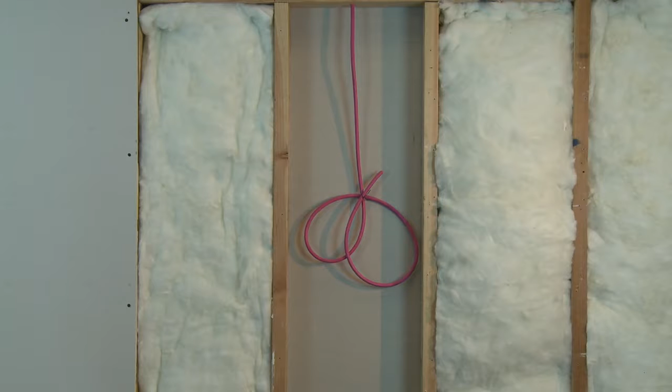Number 1. Preparation. Installation requires choosing a stud bay or ceiling joist with studs 16 inches on center. This video assumes the wire has been run to the speaker location. The Sonance website provides more information about suitable wire gauges.

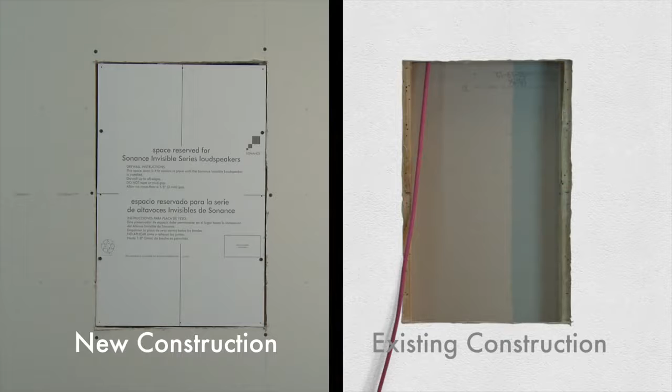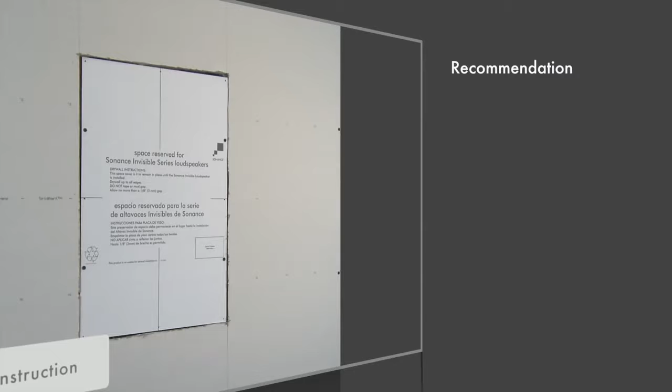Speakers are often installed into existing walls, and we'll address that process shortly. The other common case is that speakers will be installed in new construction or renovation. We'll start with the typical new construction drywall installation. A space saver can be used as a placeholder during construction. We recommend placing the Invisible Series speakers above 6 feet to minimize potential damage from picture hangers and nails.

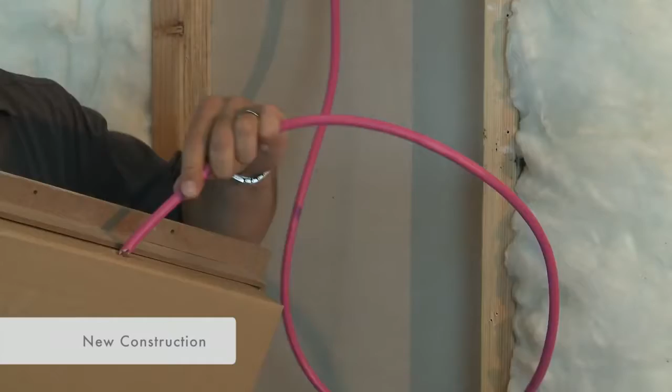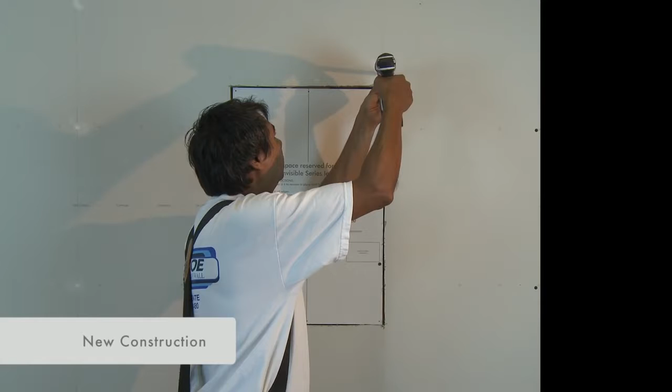Run the speaker cable through one of the pre-drilled holes in the space saver. Make sure there is enough extra wire to connect the speaker after the space saver is removed. With the aid of a level, screw the space saver to the studs in the chosen location. Transfer the space saver dimensions to the drywall, then score and cut an opening in the sheet.

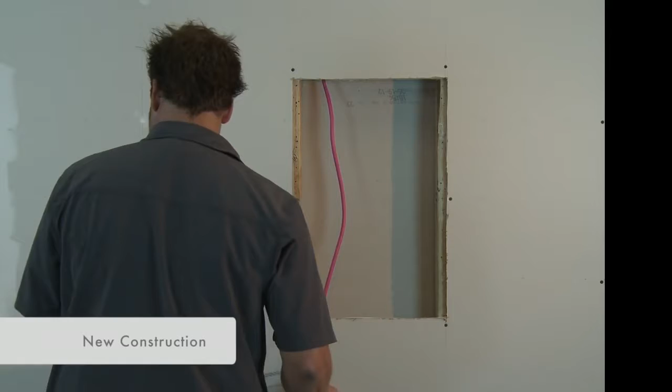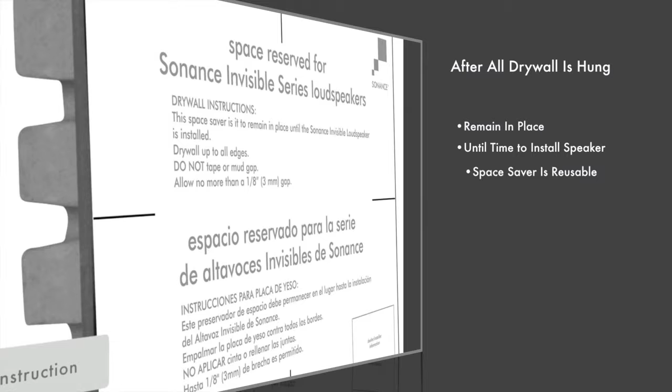Hang the drywall around the space saver and secure it to studs. Once the space saver is removed, the opening is ready for speaker installation. After all drywall is hung, the space saver can remain in place until it is time to install the speaker. Remember that the space saver is reusable and can be used multiple times. Construction would now continue as normal. The space saver should be removed when it's time to install the speaker.

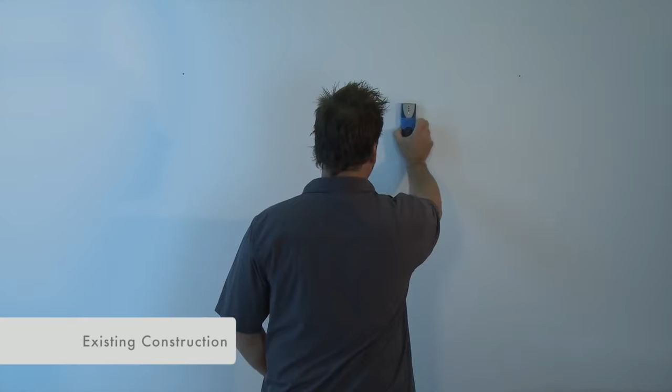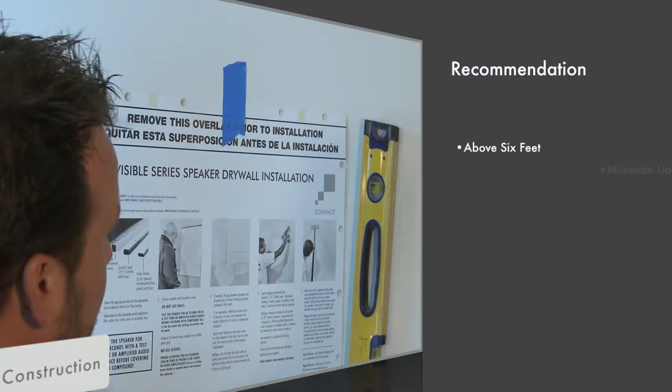Now we'll talk about installing the speaker in existing construction. Location is critical. Use a stud finder to locate studs or joists to the right and left of the chosen position. Mark the stud center lines. We recommend placing the Invisible Series speakers above 6 feet to minimize potential damage from picture hangers and nails. Use the speaker or overlay as a template to mark the exact outline of the speaker.

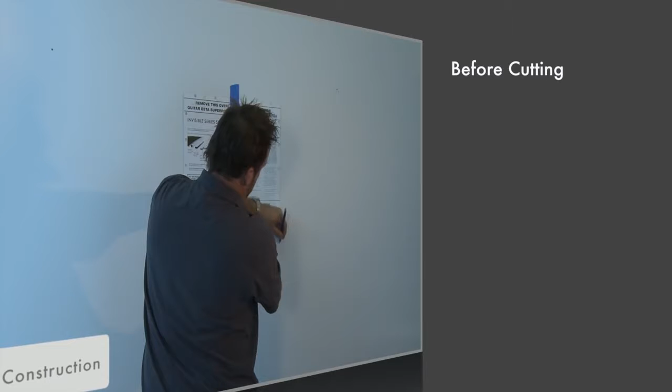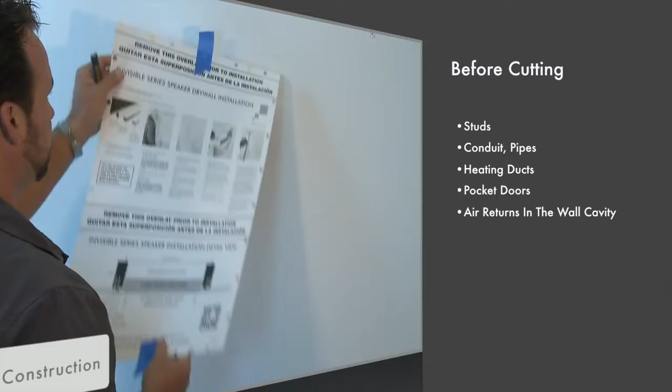Before cutting anything, perform an obstruction survey to be certain that there are no studs, conduit, pipes, heating ducts, pocket doors, or air returns in the wall cavity that will interfere with the speaker. If there are, choose a new location and repeat these steps. Following the outline, cut the speaker opening in the drywall. Now the speaker is ready to be installed. At this point, the speaker installation is the same for new construction as for existing construction.

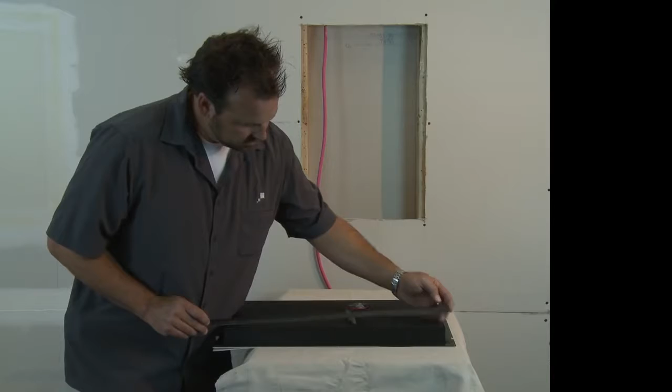Number 2. Installation. Select the appropriate shim to make the speaker surface flush with the drywall. The design allows you to match 5/8 inch, 1/2 inch, or the most common international thickness drywall. Peel the adhesive backing off the shim, then align the pre-drilled screw holes and press the shim firmly into position on the back of the speaker frame.

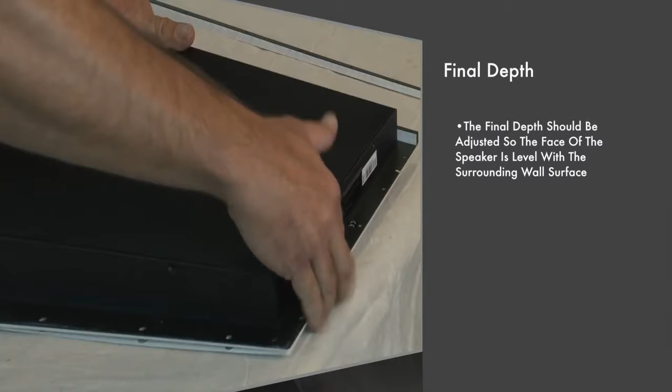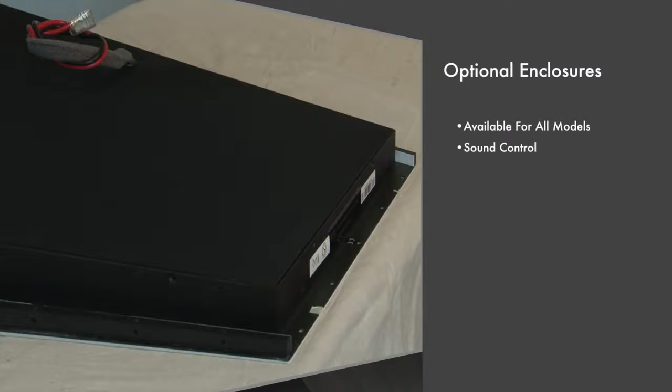The supplied cardboard shims can be attached to the studs to fine-tune the speaker depth. The final depth should be adjusted so the face of the speaker is level with the surrounding wall surface. Optional enclosures are available for all models and can be used in installations to minimize sound transfer into adjacent rooms. Using the enclosure is required for open attic installations.

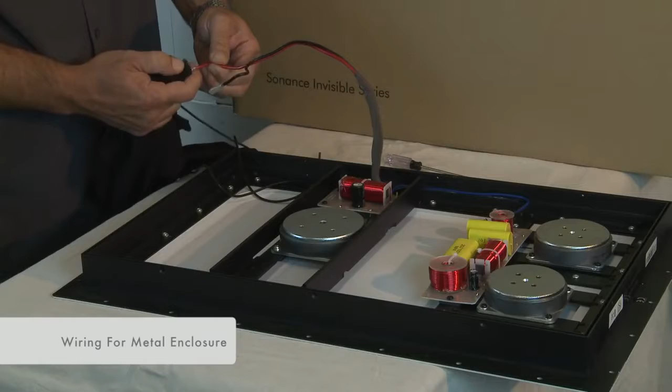To install the enclosure, remove the grill covering on the back of the speaker. Attach the speaker wires to the terminal on the enclosure. Place the enclosure in the groove in the back of the speaker frame. Attach the enclosure using the supplied screws. Where the enclosure is not being used, the area behind the speaker should be filled with fiberglass insulation.

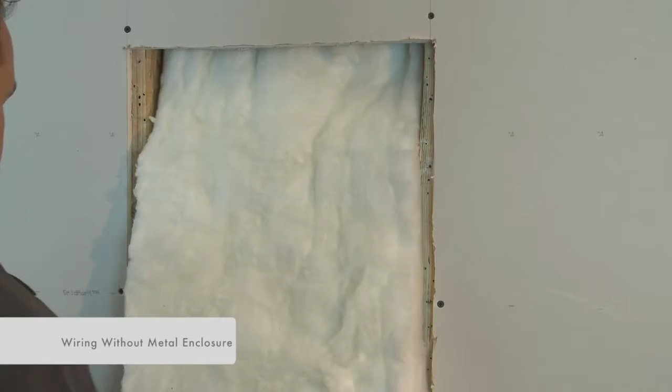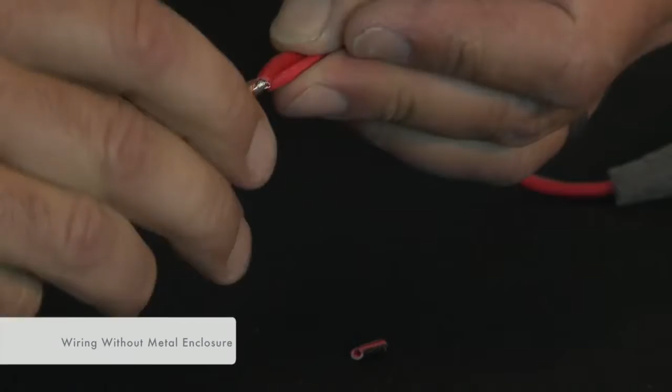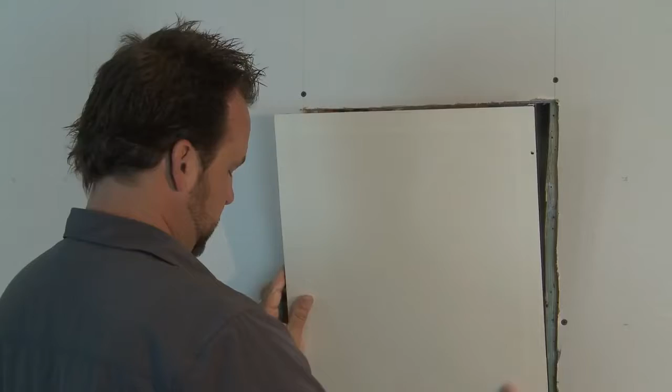Clip off the spade connector from the speaker wire. Then strip the wires, and with the supplied wire nuts, join the positive wires together and the negative wires together. Remove the overlay. Set the speaker into the opening and temporarily secure it with 4 drywall screws. Don't over-tighten.

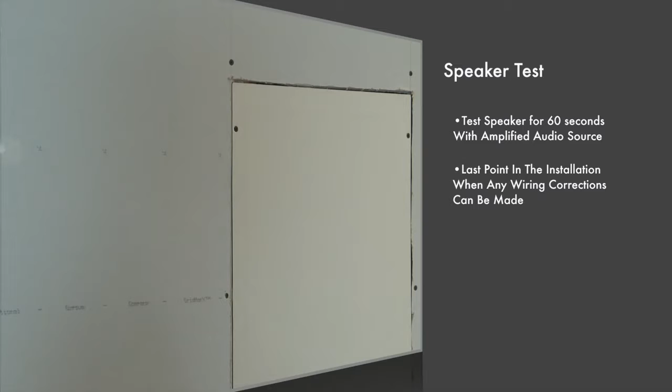Check that the speaker is installed at the same level as the surrounding wall. This is where the cardboard shims can be used to level the active surface of the speaker to the wall. Warning: now test the speaker for at least 60 seconds with an amplified audio source before proceeding. This is the last point in the installation where any wiring corrections can be made. Finish securing the speaker with drywall screws. We suggest using 4 drywall screws on each side.

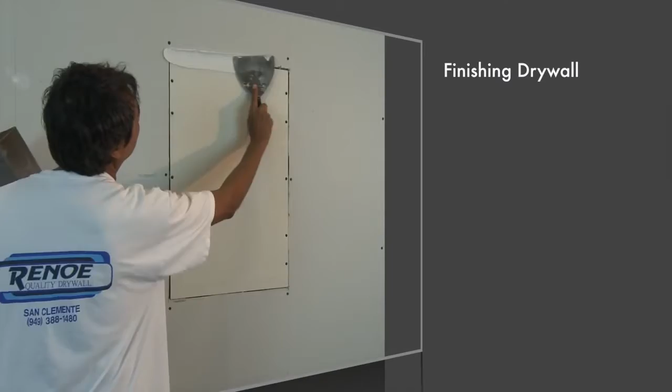Number 3. Finishing drywall. Fill the gap between the speaker and the drywall with 5-minute setting-type joint compound, commonly called hot mud. Allow the hot mud to set slightly before applying mesh tape. Place mesh tape over the seams. Place the center of the tape at the joint location. Be sure you do not tape over the raised portion of the speaker. Now allow the hot mud to fully cure and harden.

Apply topping compound as needed to achieve a flat surface. Feather all surfaces, then allow this coat to harden. For best performance, be sure the active surface of the speaker is not covered by more than 1/8 inch, 3 millimeters, of material. After everything is applied and dried, you can use a manual pole sander or block sander on the entire wall. No power sanders, please. The wall surface should show no signs of a speaker. Now the wall is ready for a coat of primer and paint, or it can be wallpapered.